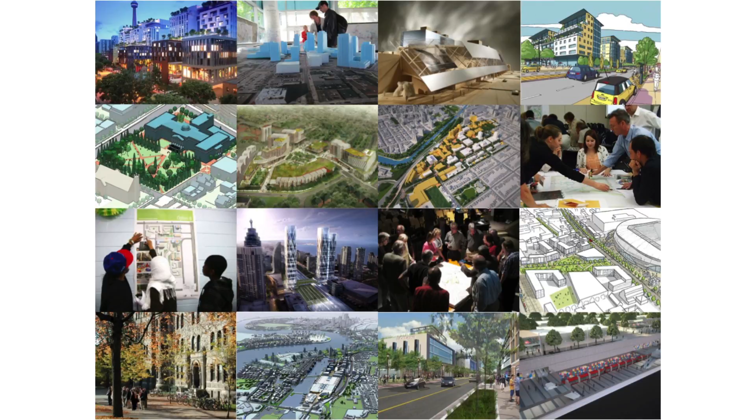We work at a range of scales, everything from working with design teams. I'm a planner, so my background is more policy planning than it is in specific design, but I work in integrated teams with designers. So we work on everything from, as an example, at the top, the second image in from the right is the Frank Gehry redo of the Art Gallery of Ontario, located just around the corner from our office. There we helped negotiating complex approvals for the project.

Everything through to, as an example, on the bottom, the second image in from the left is the Silvertown Quays area just beyond Canary Wharf lands in London, the London Docklands. So at all scales, one of the founding kind of principles of our work is engagement with the communities where we are planning. So again, evidence of that here. Obviously, the success of the kinds of change that we're working collaboratively to create must be rooted in the communities in which they will be developed.

So now back to context, managing growth in Ontario. About a decade ago, the province of Ontario, which is the governing jurisdiction that Toronto is located within, initiated 3 interrelated sets of policy initiatives, and they very much speak to the earlier question about how do we manage footprint, how do we contain sprawl.

Ontario, driven by massive immigration in the Toronto environment, has been growing exponentially. We had no recession when the rest of the world suffered after the 2008 world financial crisis. We have been growing and growing and growing, and I'll show you some stats in a little while. So it, again, in a very progressive way, one of the very few, if not only, examples of this kind of integrated planning in North America, have we actually created 3 sets of connected legislation.

There are minimum densities established regardless of where you are developing in the Greater Toronto area. If you are in the built boundary, there are expectations of a higher minimum density than exists today. In the few places where you can build on what we call greenfield land, between the purple and the greenbelt, there again are minimum densities so that the new suburbs being built will be much more compact than what has been built since World War II.

The little yellow dots indicate what we call our urban growth centers. These are either existing downtowns or places where high-order transit exists today or could be brought in a strategic way. These are the places where the most growth will be concentrated, and many of these are in suburban locations currently characterized by power centers, low-format retail development, which will now be transformed into a much more urban fabric.

So within this framework of massive growth in Ontario, we're going to talk about what's happening in Toronto. This is just one image, in our downtown, but it gives you a sense.

We have built, I'm not sure the exact number, but hundreds of towers in the last 10 years. Most for residential purposes, but we're beginning to build office and employment towers as well. This pattern of tower development is pushing to new heights—many of our towers now are in the 80-story range, taller than what's happening in most cases in New York City, certainly in most cases in Europe. I'm not sure everyone understands how this phenomenon occurred, but a lot of people associate it with the intention to control growth.

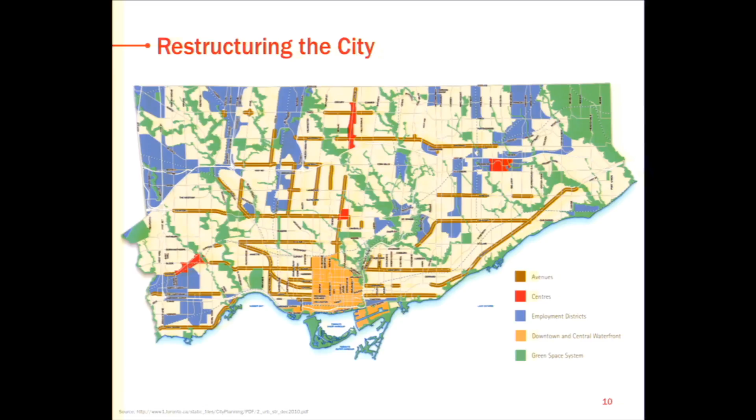Beyond that, there'll be intensification in centers shown in red, which are the historic centers of the original cities that now comprise the bigger City of Toronto. The final category, which we'll talk more about, is avenues, many of which are historic streetcar streets. Some are places in the suburbs where future light rail transit is intended. The idea is that corridor-based development, connecting land use and transit investment, is the way to accommodate so much of this growth.

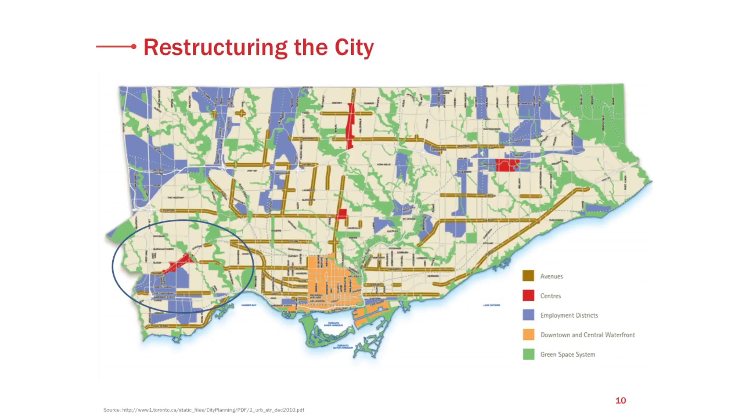I'm going to show you on the next slide a zoom in of this area, which is nearby where the Humbertown site is located. What's most helpful is to pay attention to the red area, because we're going to switch the nature of the map and look at the finer grain of land use.

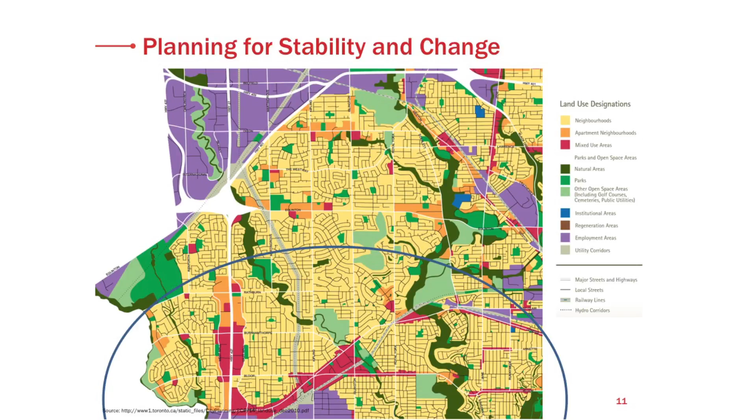The detail itself isn't important here—what I want to emphasize is the relationships. The red area at the bottom is that same area we looked at, which in simple terms is one of the places where the City of Toronto is encouraging change, a mixed-use area. Not all of this is currently mixed use; in fact, much of it is single-purpose, post-industrial use. But the intention is that it should be developed in a very integrated way at a much higher density.

What I wanted to show you with this is that all of these areas of change have very intimate relationships with the neighborhoods behind them. So transition is one of the city's greatest challenges: how do you accommodate major new growth in much denser building formats immediately adjacent to low-rise neighborhoods that people value very much and associate with the quality of life of living in Toronto?

So there are a variety of tools for that. One of them is the Tall Building Guidelines—this is the third iteration of Tall Building Guidelines in the City of Toronto. Our office had the great opportunity to work with the city in creating this latest set of guidelines, which is very much about where do those hundreds of towers that we've been building go.

Equally importantly, where do they not go—where should they not be located? Once the decision is made about where they go, how do they relate both to each other, because they do tend to want to cluster in Toronto, and how do they relate to their context?

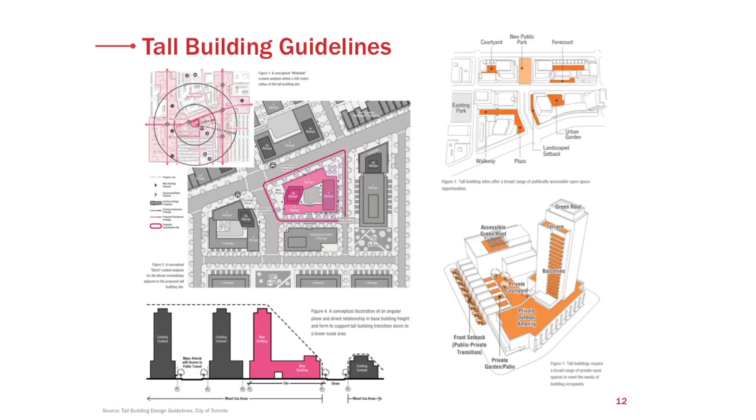And then transition down from the top of the tower into the context that either exists or is planned—looking at things like the contribution a private development makes to the public realm, where the building should be located on its site, how it will preserve a good quality streetscape on the frontage, and the relationship to environmental performance considerations. At the bottom of this image, you can see the indication of green roofs and how that fits into the bigger picture of the tower's development.

On the avenues, the kind of context Humbertown is located in—one of those mixed-use site designations, an area of change—the scale is intended to be lower. Buildings are what we call mid-rise. When they're on the avenues, the height of the building is very directly correlated to the width of the street, the right-of-way, so a one-to-one relationship has been understood to be comfortable in terms of supporting intense street-related development on each side of the road.

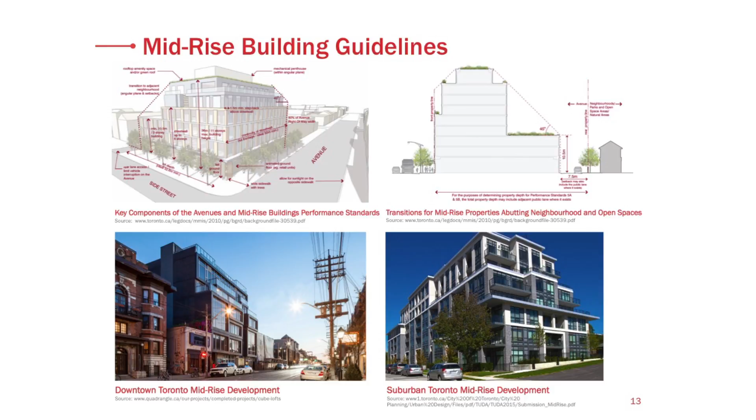Toronto was, I think, the first city in North America to institute a green roof bylaw. Any development over a threshold of 2,000 square meters needs to provide between 20 and 60% of its roof area as a performative green roof. Because of our building boom, we've been able to move the needle very significantly on this performance standard.

The other requirement is compliance with the Toronto Green Development Standard, which looks at everything from building materials to waste management during construction, to the environmental and energy performance of the building over its lifespan, things like vegetative responses to greening the site, and movement—provision of alternative forms of transportation. It's a system that works hand in hand with the LEED system used in North America, very compatible.

All projects are required to do what's called Tier 1 of the Green Development Standard. Many are encouraged to go to the next level, Tier 2, which is more consistent with LEED Gold. In exchange for that, there are financial incentives in terms of credits from the development levies that would otherwise need to be paid.

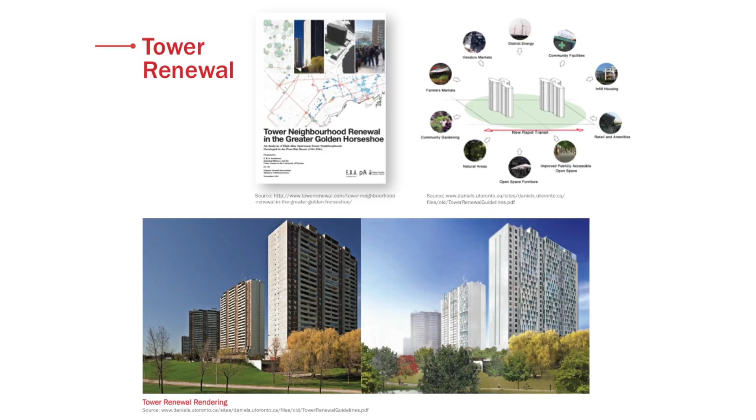I think the format is quite familiar—they literally are towers in a park. They're beginning to fail from a mechanical perspective, and there are a lot of challenges in terms of energy performance.

Part of this program is the opportunity to seek funding and city-provided expertise to update systems and update cladding, as you can see in the image at the bottom of the slide, but also to think about the way these buildings function as part of the urban community.

Right now, this form of development is very isolating, very separate, and in many cases not served at all well by transit. The image on top shows that there has been an effort to change the zoning permissions that apply to these tower neighborhoods, to allow intensification on the ground plane, taking away some of this vast expanse of green space and filling it in with new places to live and new places to work.

There's a whole effort to encourage local small businesses and entrepreneurialism to repopulate the ground plane, in some cases beginning by coming into the bases of these buildings and offering small shops. Access to food is a significant issue—it sounds like it should be easy, but these can be vast tracts of land which make it very difficult to walk or take transit to places for local shopping. So all of that is an integrated theory in terms of bringing these tower neighborhoods back into the city fabric in a more performative way.

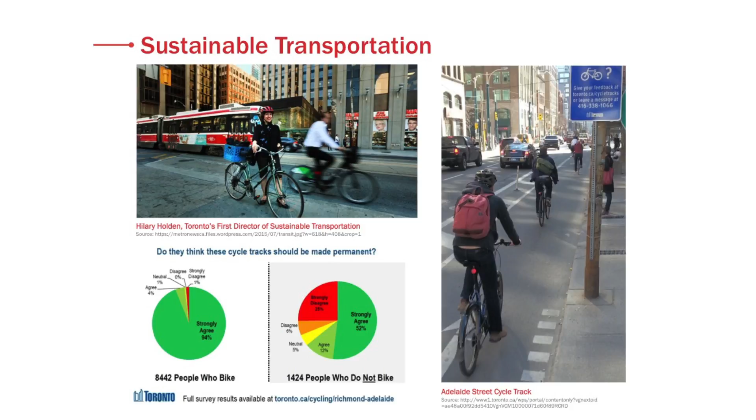I mentioned we have a growing bike culture. That is with almost no infrastructure and a fairly challenging climate—very, very hot in the summer, very, very cold in the winter—and yet people are cycling. I think if we were able to get ourselves to the next step and really build the infrastructure, it will be a powerful contributor to mobility, and that's entirely possible.

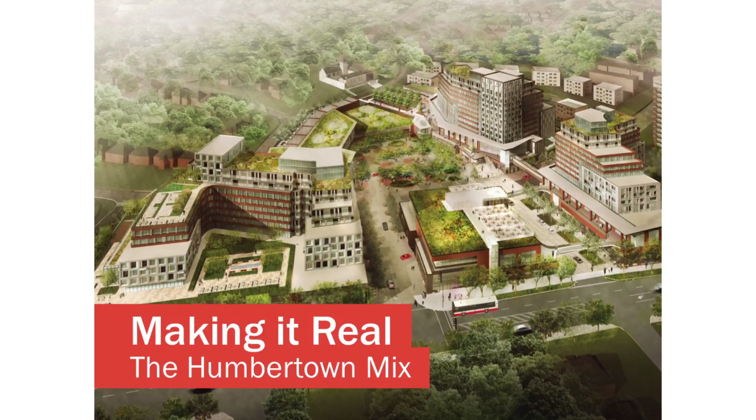So now coming back to ground, the project I mentioned I was going to talk about is called Humbertown. This is an image we'll come back to a little later in the presentation. Just to locate us within the bigger context we started off with, the Humbertown site is located within the city of Toronto, but at the western end, definitely in a suburban context.

It's in one of the very treed suburbs that was built after World War II, a very affluent suburb which has not had a lot of change. This proposal was a series of conversations over many years about what form that change could take to contribute to the community, but also make this particular site much more contemporary and performative in a variety of ways, along the lines of what we're talking about today.

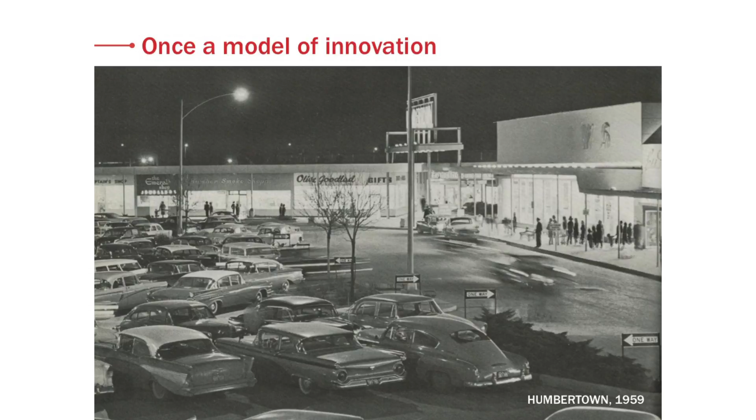So this is one of the images we like to show. When Humbertown was built, it was a kind of model of its time in North America, where shopping was taken off the local streets and put into a dedicated sort of place. It was very exciting to be able to get in your car and drive somewhere to shop, completely different from the shopping patterns before.

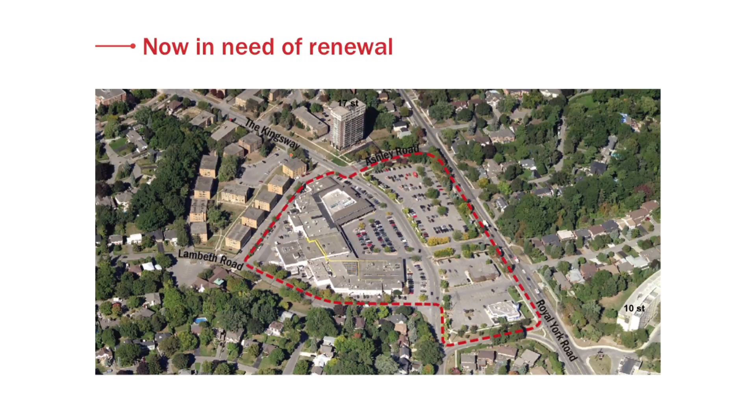And also what we're now seeking to strive for, where people do not have to do that. So this is the site today. The main shopping plaza is on the left-hand side, in the triangular part of the site, bisected by a street called the Kingsway, which is important - we'll come back to that. You can see that the majority of this site is either black or gray. Brian talked about asphalt - that's what this site is entirely about. It's either paved surfaces for parking cars or hard asphalt roofs that right now have no water mitigation or heat island mitigation happening on them.

And yet you can see that the context is very green. Toronto is a highly treed city. I can't recall the specific statistics, but we have one of the densest tree canopies of North American cities. And so Humbertown, while it is a suburban setting, is definitely characterized by its tree cover.

So like all good planners, we look to Jane Jacobs for inspiration in terms of the vision. And I think what's most important here is that rather than a single land use purpose, which is what Humbertown is today, the vision was to provide a whole range of things happening. And again, you need to remember that this is in a suburban context - it's not immediately evident that people in the Humbertown neighborhood would want to be able to do all of these things on a site such as this, which for decades has been dedicated just to shopping.

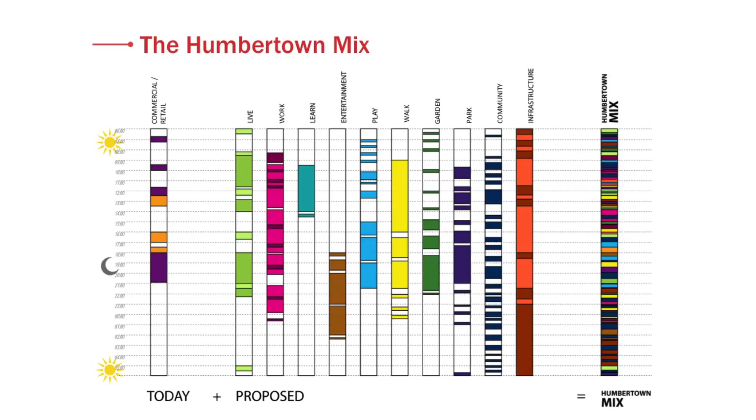So the goal is to take a site which does not make great use of infrastructure. One of the other major drivers of the provincial focus on growth management is to make best possible use of existing investment in infrastructure - whether that be water resources or road networks that have been provided. The Humbertown site is used only a few hours of the day. The goal is to make sure it is a dynamic community used at all hours of the day by people at all different stages of their lifespan, so that it is truly active and mixed use - the Humbertown mix.

How do we do this? Because essentially we're creating a brand new sense of place, trying to completely reimagine the way that the site is organized. The first step is to identify a series of blocks, so to break down those two parcels on either side of the Kingsway into 5 development blocks, to center the development around a new village square, really as the heart of the existing Humbertown community, but also of this new development.

To recognize the Kingsway as the extension of that village square and the new Main Street or High Street, the place for community activity as well as retail activity. To think about how open spaces will integrate the site into the existing neighborhood, but also connect all of the various components of this new mixed-use development together.

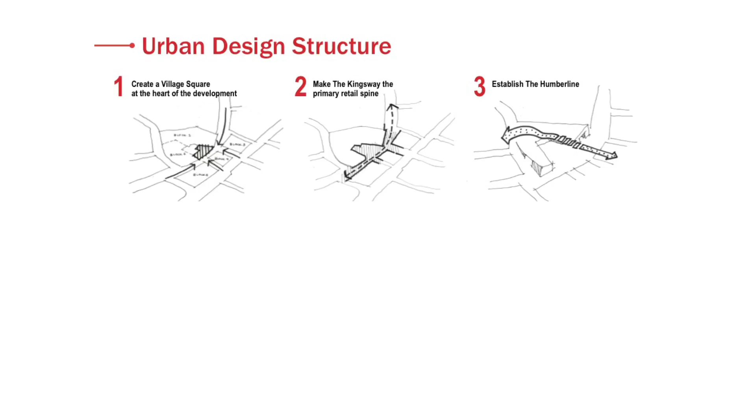So one of those elements is the Humber Line, which a little shamelessly takes its inspiration from the High Line in New York. It was very exciting at the time that this was planned. But the idea of the Humber Line is to transition between - there's a significant grade change on the site, about 1.5 stories taller on the west than it is on the east. So the Humber Line both provides connection across the site, but also allows the architects to mediate between the fact that there will be a change in grade where the retail and community spaces are located from west to east on the site. So pretty interesting for a variety of reasons.

The redevelopment provided the opportunity to deal with some of the things on the site that the community did find annoying, like the fact that servicing - loading and truck servicing for the commercial uses - was exterior and not at all acoustically mitigated. Now it will be completely within the building structure.

To think about the layering of land uses - this will maintain its role as a major community retail center. In fact, the amount of commercial space will double, so it will be twice as important in terms of shopping patterns in the community as it is today, in part to continue serving the existing community, but also to recognize that there will be about 1,000 new residents on this site once development is complete, in a range of building forms. So there are townhouses, grade-related housing, apartment blocks, as well as a seniors or retirement residence as part of this mix.

Again, understanding that this can play a role for people at all spectrums of their life cycle. And the final is a big deal in the suburban context, which is that all of the parking is being pushed below grade, or almost all of it, which is a cultural challenge.

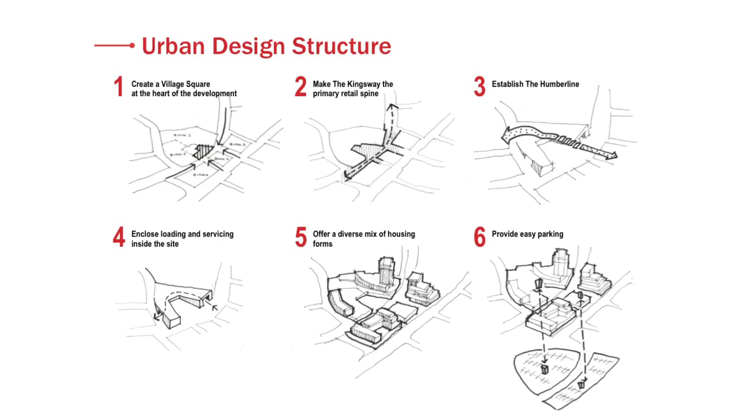A lot of people in the Humbertown neighborhood are older, and the idea of parking in a garage is a little hard for them to get their mind around. So one of the key things are two little icons, what we call lanterns, that have been used to orient people on the site. Once you see a lantern, you know that's the major entrance to the parking area, as well as the connection between the grade changes I mentioned, since the public spaces are on two different levels in the site.

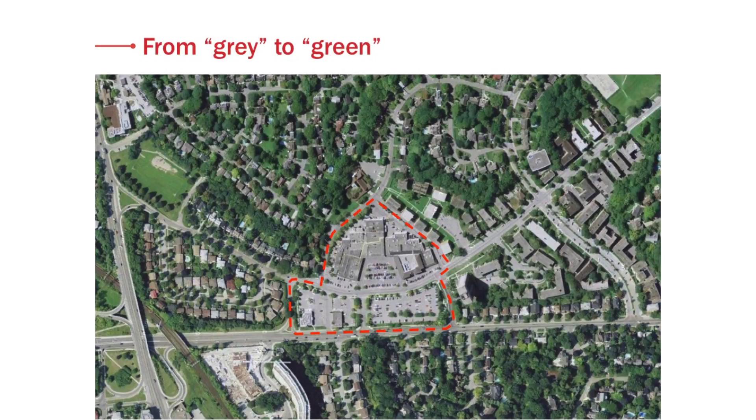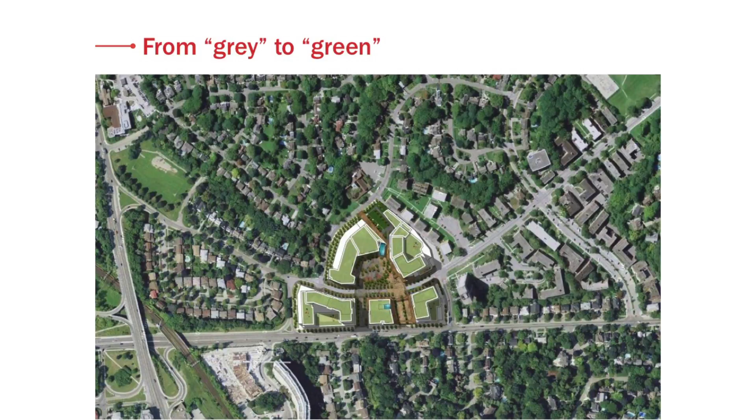So the goal is to take this very non-performative, what we call a gray site, and transition it into a green site, which is much more fitting with the very green context it's located in. You can see here an intense application of green roofs, green walls, high albedo surface materials, as Brian talked about in terms of the paving structures. So everything has been designed to be as performative as possible.

Some of the statistics: there are 3 significant new residential buildings as well as the townhouses I mentioned. There are almost 100,000 square meters of gross floor area, a very significant new community effort. A lot of bicycle parking to balance the car parking, which is still required.

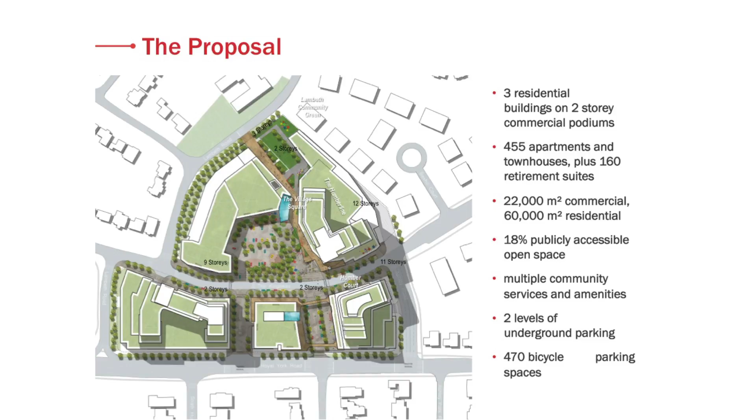The site is organized by a really comprehensive public realm. Right now, as you could sense in those earlier pictures, there is very little, almost no public space on the site today. It really is a parking lot. There are a few cafes that certainly are community focuses, but there's nowhere to actually come to the site, to sit on the grass, to sit on a bench, to watch urban life.

That really has been the organizing device in a series of four different spaces, which I'll show you in a minute. But almost 20% of the site will now be publicly accessible, and really intended to be the heart of this bigger initiative.

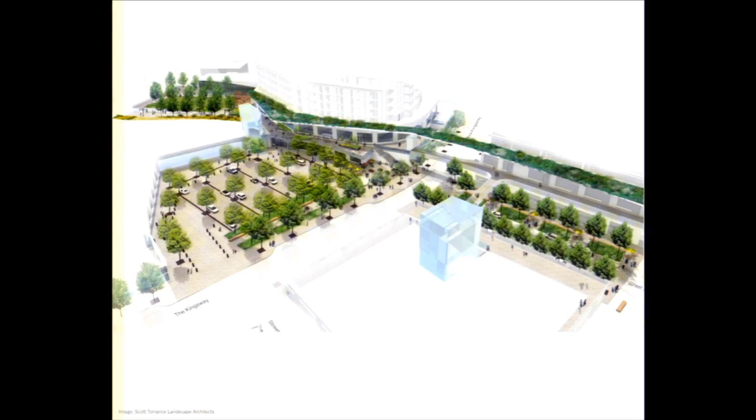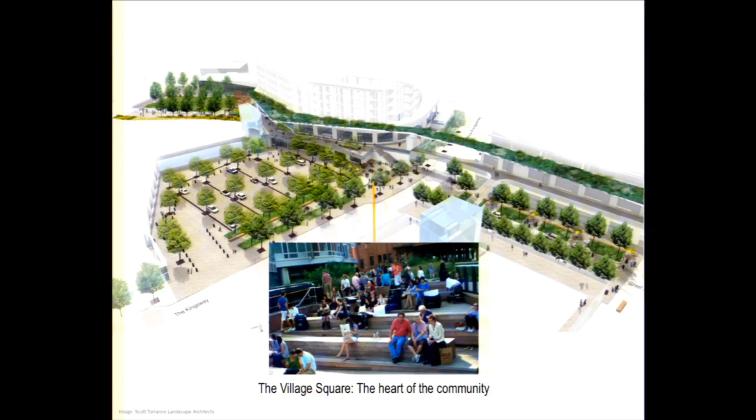Looking at an axonometric image, the idea is that the Humber Line, which runs across the top of the picture, will transition from west to east, connecting to all of the distinct spaces like the village square, which really is the heart of the community, and a set of steps, again making that grade transition, providing a wonderful opportunity for a place to linger and people watch.

Humber Court, which is at the front of the development, is really the transition from one of the other major arterial roads, Royal York Road, which is the frontage of the site, as a way to come into the site.

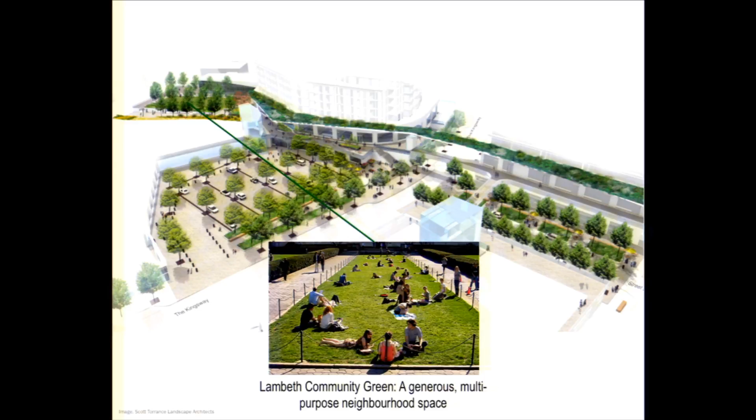Lambeth Community Green at the back of the site is a park space, although actually really more like a green roof, because it is located above the building infrastructure and parking below grade. So it feels like a park on the surface, but is actually a performative green roof. And the Humber Line, again, is inspired by the New York High Line.

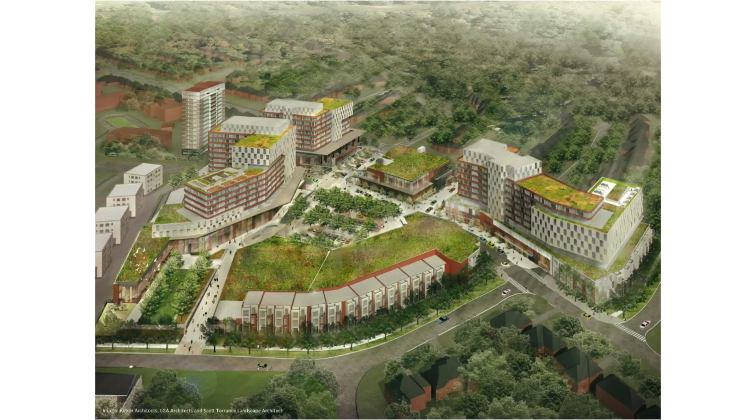Here's an image showing the range of development, giving you a sense that not only visually but functionally, the site will be dramatically more of a contributor to the urban context and a reduction of that heat island effect that Brian spoke about.

We're looking here, on the bottom left-hand side, at the Lambeth Community Green, the village square in the center, and moving out to Humber Court. You can see the scale is quite variable in the buildings. The tallest building is about 12 stories in height, following those mid-rise building guidelines I showed you at the beginning.

Here we're looking at the Humber Line on the right and the Lambeth Community Green on the left, showing just how porous the site has been designed to be, so that it provides a way to move from one side of the neighborhood to the other, making this the real centerpiece for people's various routes across their neighborhood.

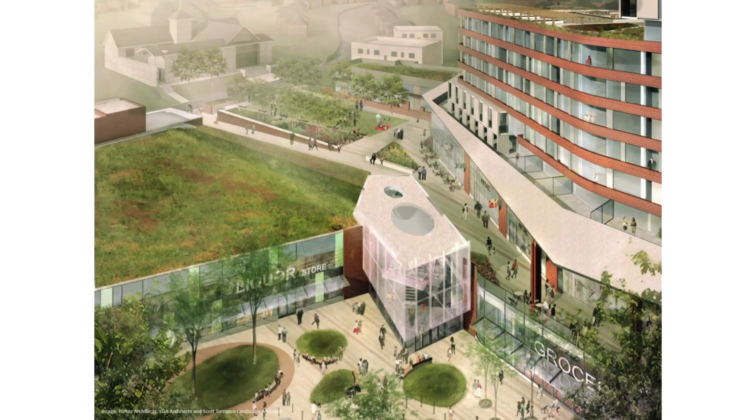This is one of the two lanterns, the primary one, which connects to the community green on the top left-hand side of the image, straight down to the public level of underground parking, also making the transition between the public spaces above on the second level and the village square, which you can see on the bottom of the image.

It's really iconic and intended to help people find their way around the site—'I'll meet you at the lantern,' similar to how people in Lund say 'meet you in front of the bookstore.' This is intended as the landing spot for people making arrangements in Humbertown. We've also tried to daylight the parking garages, making them as comfortable as possible for people not used to parking in a garage setting. The ability to see the sky through the lantern is an important objective.

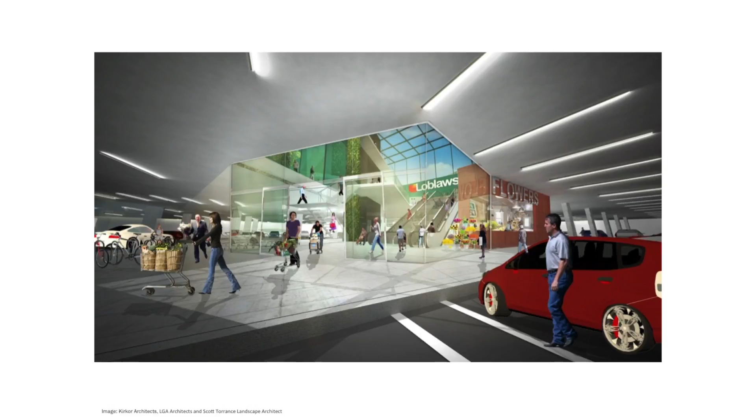And some of its many environmental features: rather than being car-focused, it's very much about the pedestrian, human in orientation and scale, with a strong focus on access to transit, a variety of cycling facilities, extensive green roofs, and a whole variety of indigenous plant materials—careful intention to create a diverse plant environment so it can flourish over time. There's also a whole variety of strategies to manage rainwater on the site, to collect it and use it to establish trees in their early years, and to manage rainwater so as not to surcharge the city's sewer system, which has a variety of stresses.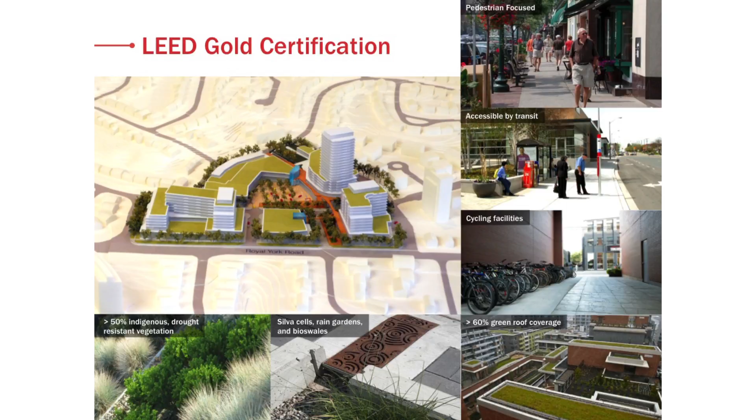One other thing I didn't mention is that there will be, I believe, five times as many trees on the site once this is developed. One of the very progressive things being accomplished is that any existing tree of significant size and character will be maintained and transplanted out of the parking lots into the street and surrounding street network. That's been the subject of a lot of conversation, but a very important aspiration.

It's been a long process. As I mentioned at the beginning, we're very committed to working with the communities where our projects are being planned. There have been a whole variety of public meetings—this is one very angry one we had to move our way through, more than 1,000 very unhappy people at the beginning. It's taken almost four years to secure the planning approvals for the project, and it will take at least another six to build it. This is something we've been astonished by.

I understand that planning in Sweden is much more centralized, which may not be entirely positive, but you're able to affect change in a more rapid time frame than we are in Canada. At the end of the day, though, a very successful outcome. We were needing to go to the Ontario Municipal Board, our appeal court for planning matters, but there was a negotiated settlement between the community and our clients, and now there's quite a lot of comfort and excitement around moving forward on this project.

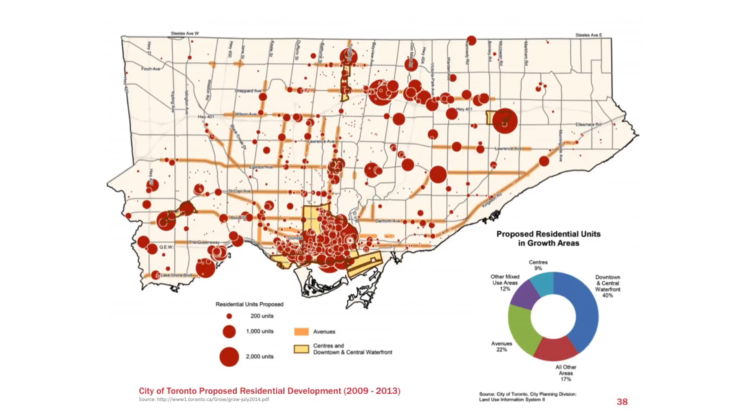Bringing it back to what's happening at the city level overall—remember that structure drawing I showed you, indicating the centers, the downtown in the middle, and the avenues. You can see this tracking the success of residential construction. There's a corollary drawing for non-residential construction too, but you can see that the structural intentions of the city are very much succeeding in organizing development, using those various tools to manage built form in a way that contributes positively to the communities these new developments are located within. And I think that's it. Thank you.

I wonder what your best advice to all our students here would be for their future professional careers—how to persuade 1,200 angry NIMBYs that it's a good idea to develop their affluent society, changing it into something they're not feeling comfortable with.

It's a great question, and I don't know that I have an easy answer. Patience is probably one of the biggest skills we need as planners—understanding that people oppose change because they love where they live, and that's important. You need to understand why, respect that that's what's driving their concern, and have a lot of conversation with the existing community about what's important to them.

What did they feel is missing from the Humbertown neighborhood today, and what could this new development offer to them? That is actually one of the reasons why the significant seniors housing component came into the development. That was not something that was initially proposed.